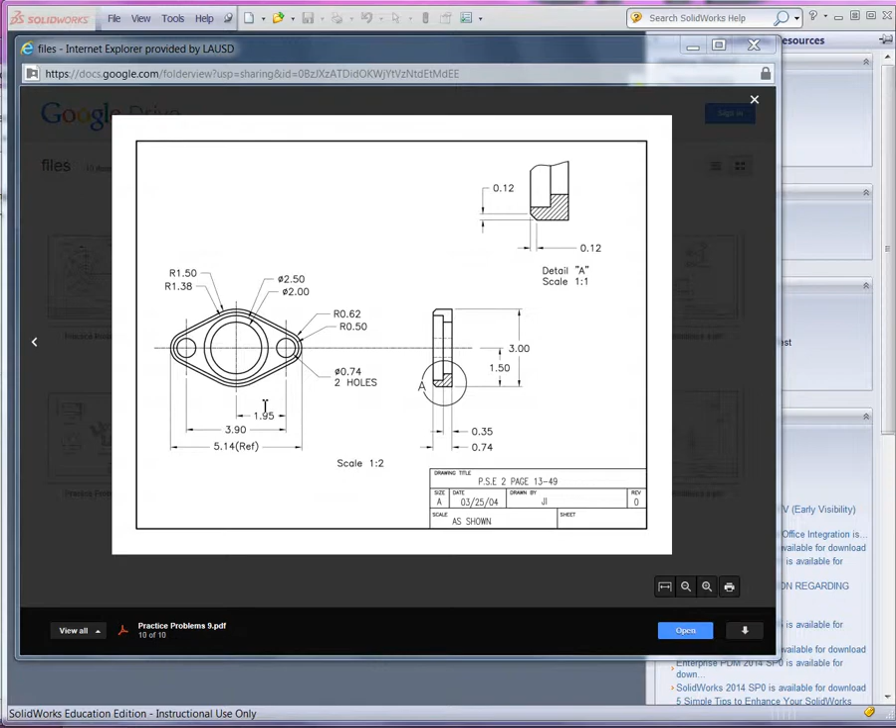One way to look at this is if we look at the top view here, we could certainly set up the base extrude sketch centered on the origin and use some mirrored sketch entities to create the profile and the hole, which we can extrude as the base. Then we could use our legacy hole wizard for the counterbore, and then finally finish with our chamfered edge. And then we can take a look at developing the drawing.

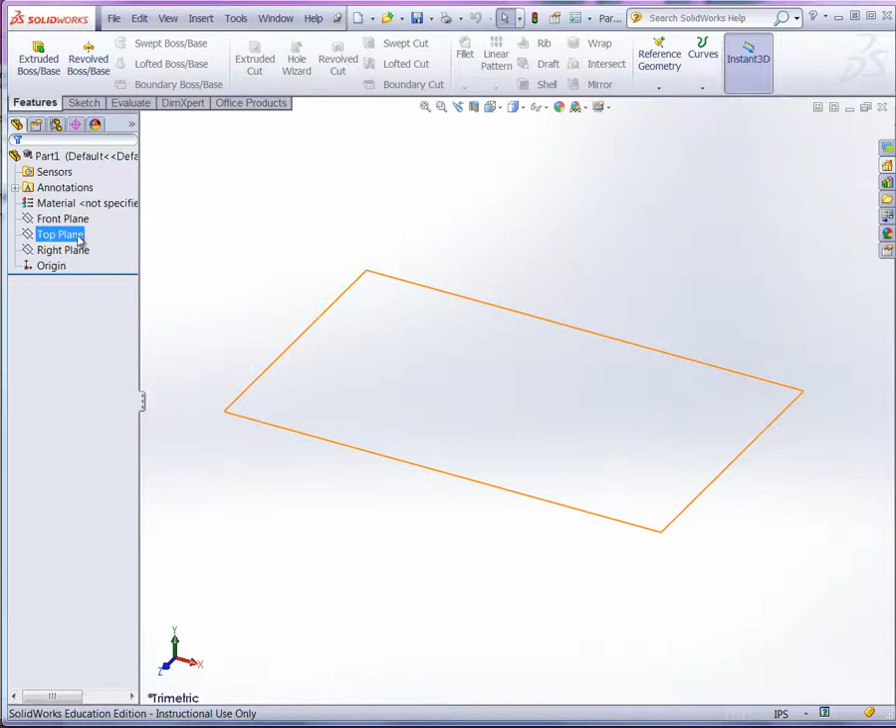So why don't we start with the model first and go ahead to our SolidWorks here, and we'll just start with a basic part template. And one of the first things we want to do here is let's just take a look at our units. I'm just going to use the basic inch, pound, second. Okay. And since we talked about using the top plane first, let's go ahead and select the top plane and start a new sketch there. Also, I want to make sure that I can see my origin, because I'll center everything there.

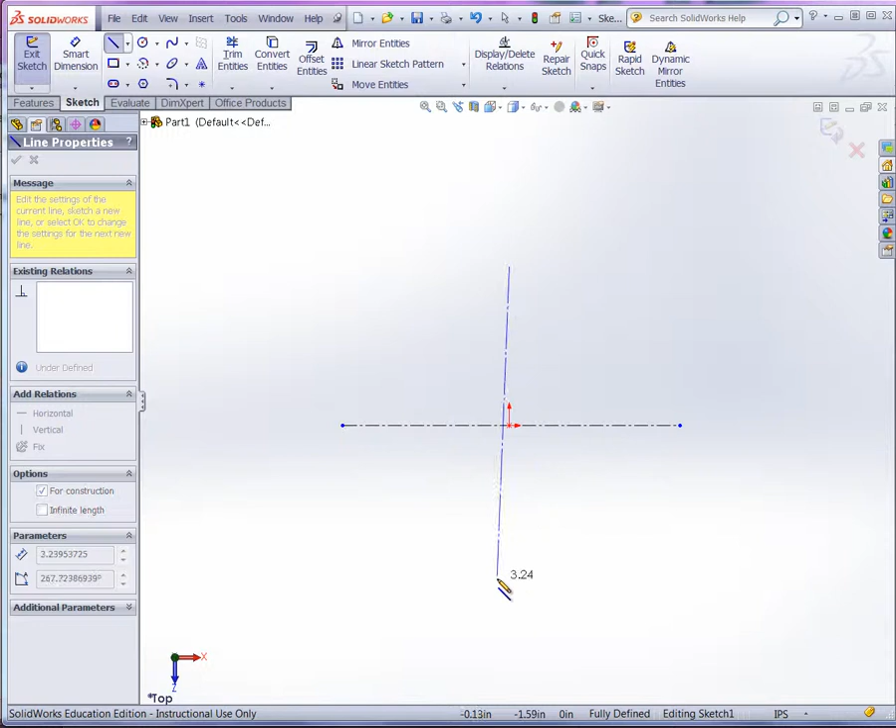And we'll start with some center lines. Just going to project away from the origin there, create a horizontal line going through the origin, and then we'll do another center line that's going to be vertical passing through the origin. Alright, and as we continue with sketching, this is where I can try to use some dynamic mirror to create our layout here. So first of all, let's start with some radii. We got the center radius here, which I'm going to start at the origin, and I'm going to set that at 1.50.

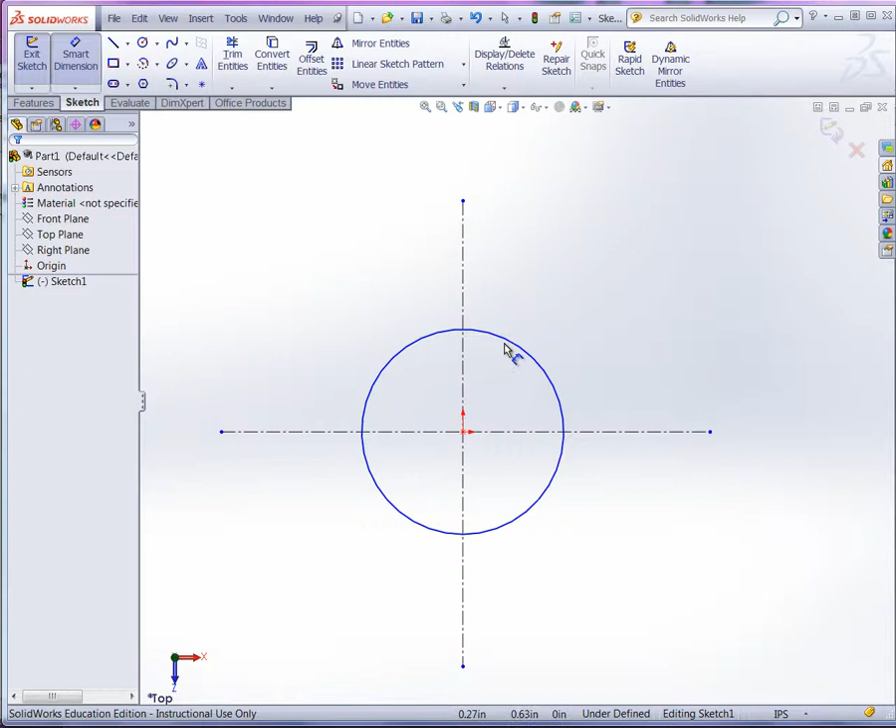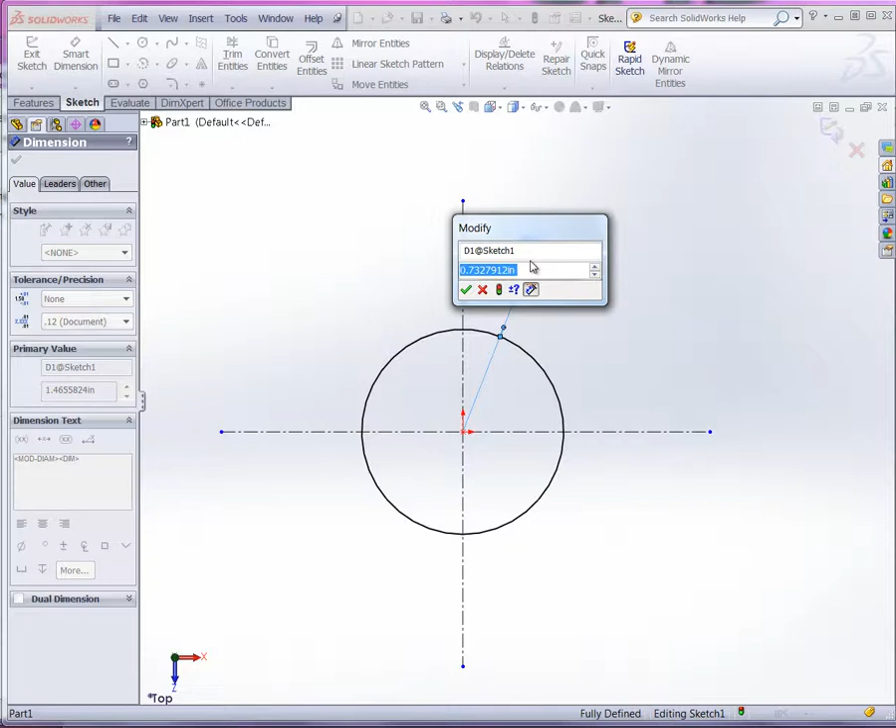Alright, you can see it started with a diameter, but if I just click out of this, select that dimension, right click, and then display it as a radius. Actually, you can see here it says diameter again, so I'll do it like this, right click again, and now you should see radius. It's a little bit cumbersome, but there it is. We'll do radius, and this should be 1.50. Alright, and then next to that we'll do another radius. Again, I'm just starting with the base extrusion profile, which is 0.62.

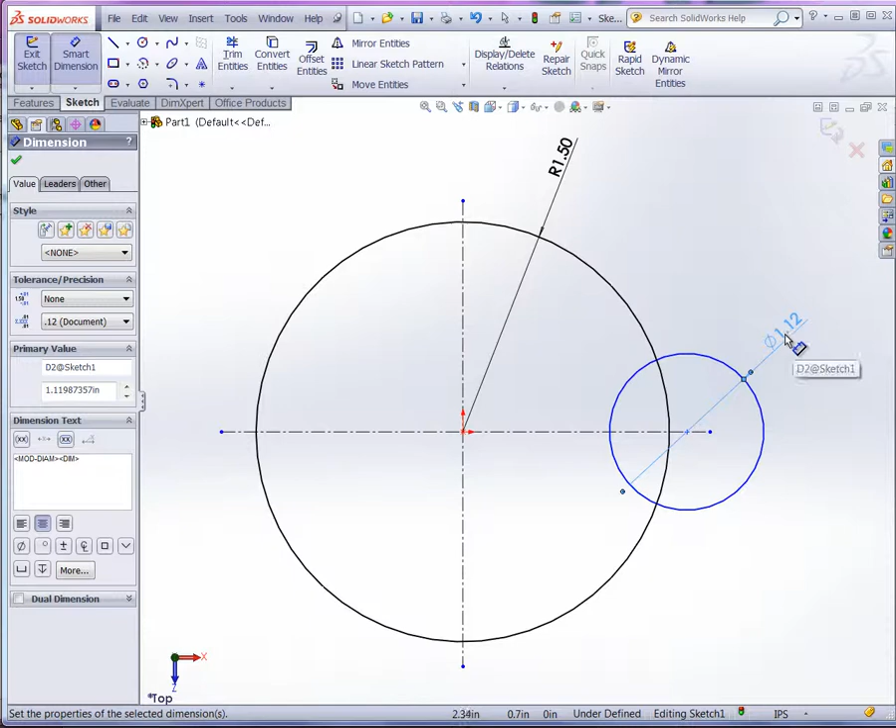Okay, so I'm going to start coincident here on this horizontal construction line. Let's start again with circle, start coincident there, and then use smart dimension. Again, you can see how it went into diameter. I'm just going to right click there, show it as a radius, and this should be 0.62. Alright, now the other thing is I also want to set the distance correctly, and it should be at 1.95. So I'm going to select the center here, and select the center of this circle, and then place that at 1.95.

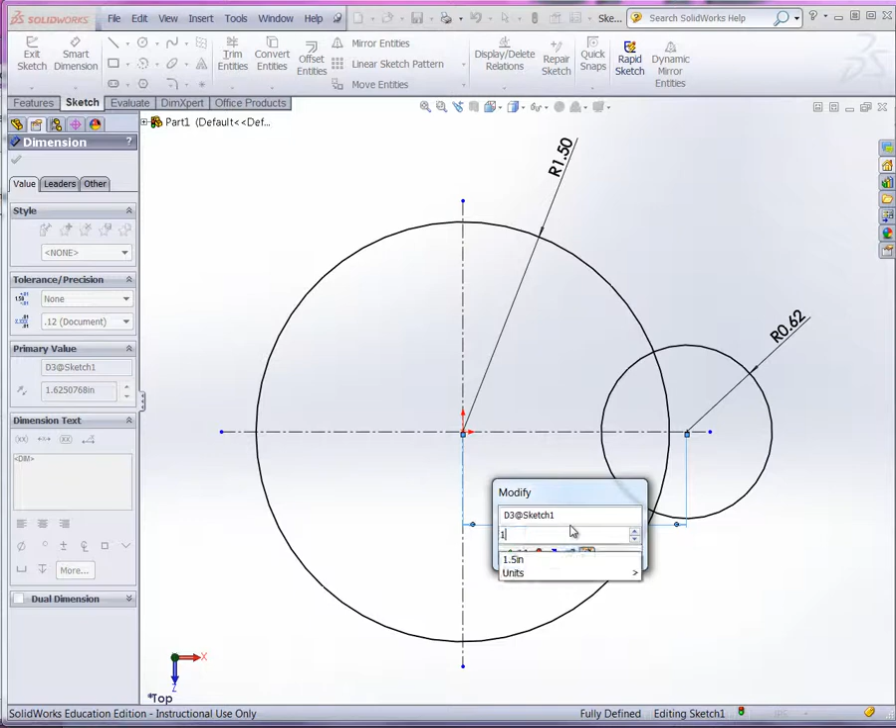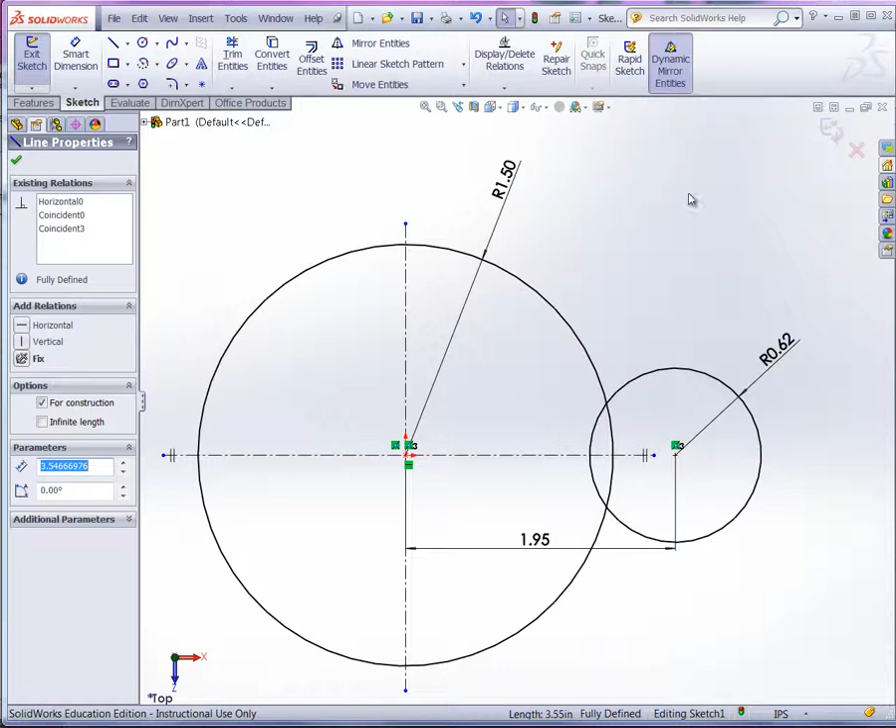Okay. So basically I have 1/2 here, and I can continue sketching out the rest. But what I'm going to do is do the sides here first. So I'm going to select that horizontal construction line and then activate my dynamic mirror. Now I'm doing this so I could do the bottom half. Okay, and I'll go like this. Start with line. First, I'm just going to draw a line. Then I'm going to use relations. Okay, so I'm just going to exit the line command there.

I've got one line selected, and then I'll control click one of the circles. And you can see here we can add a relation. So let me try this again. Let's try the line and then control click the circle there. We should be able to select tangent. Deselect just by clicking anywhere in the drawing area. Again, reselect the line, control click the second circle, and then again use add relation. So you can see, because I still have dynamic mirror, the bottom half is also adjusting.

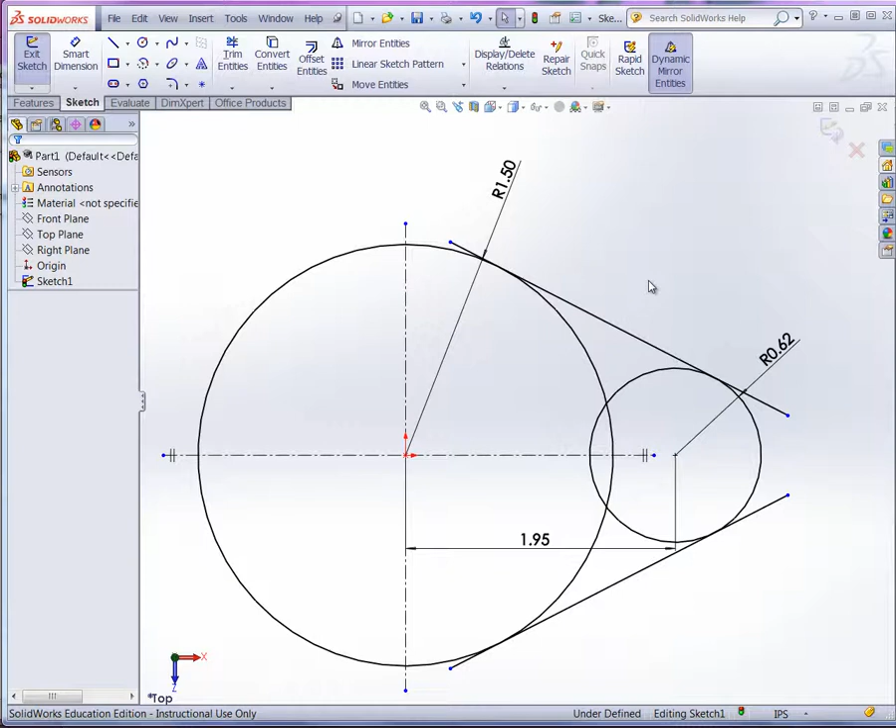Alright, now before I do the other side, I'm just going to trim up the line work here to make it easier to mirror to the other side. So I'm going to use my trim extend command here. Just trim off the excess, and then on the inside as well. All right, we got that.

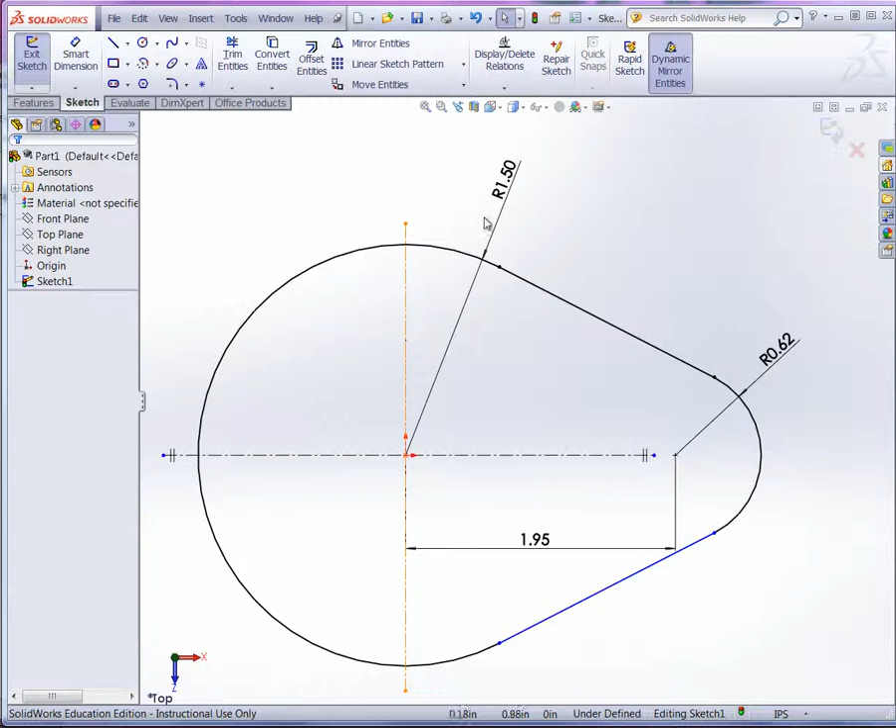Now, using our center reference line here, we're going to use mirror entities. So the entities to mirror are going to be the line here, the arc, and the line down here. And for our mirror axis, we're going to use that vertical construction line there. And then click OK. I'll use Fit to zoom out. And then now we have just a couple more trims to make. So this would be the base profile.

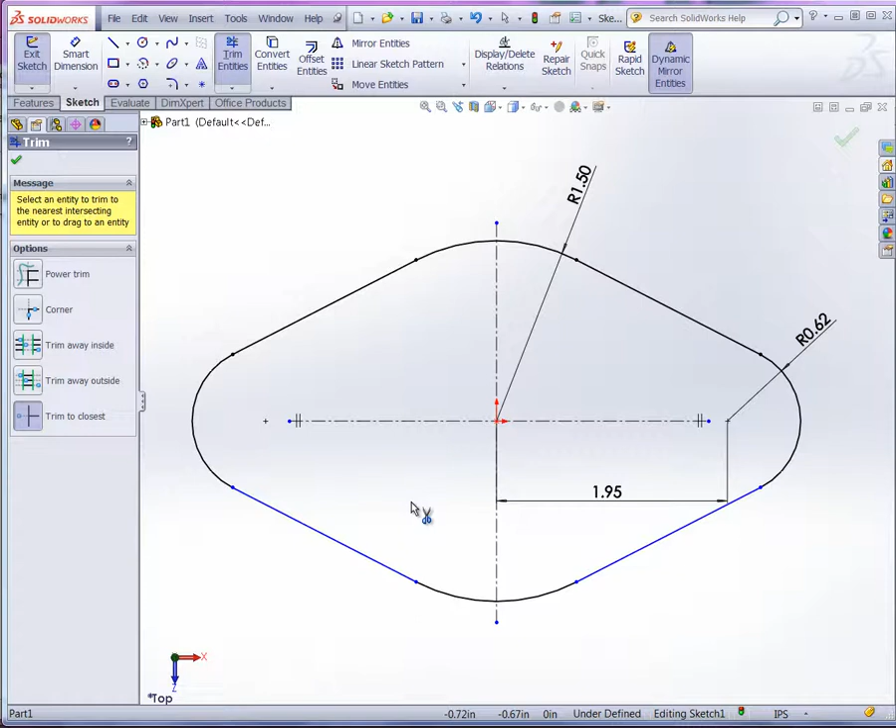Now at the same time, we can create the hole, the two side holes there, which is a diameter of 0.74, and it's also 1.95 from the center there. So we could actually make it concentric with this arc. Now, what I'm going to do is I'm going to select the vertical construction line here, and you'll notice we're going to turn on the dynamic mirror once again, and I'm going to come over here to circle.

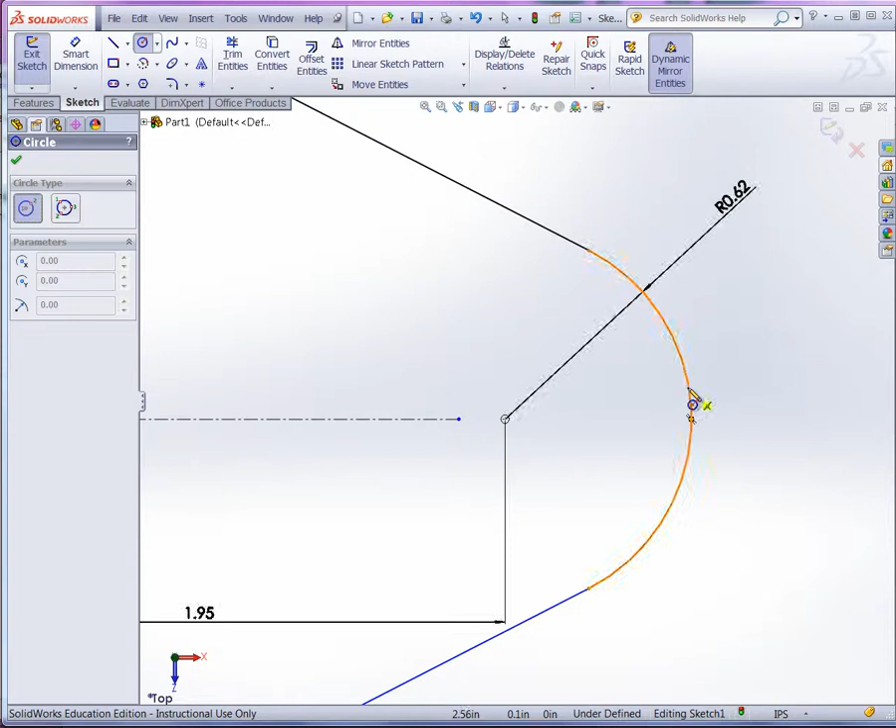I'm going to sketch the circle. First, I'm going to hover over the arc so I can detect the center there, place it, and then we'll dimension it. And that should be a diameter, using Smart Dimension here, a diameter of 0.74.

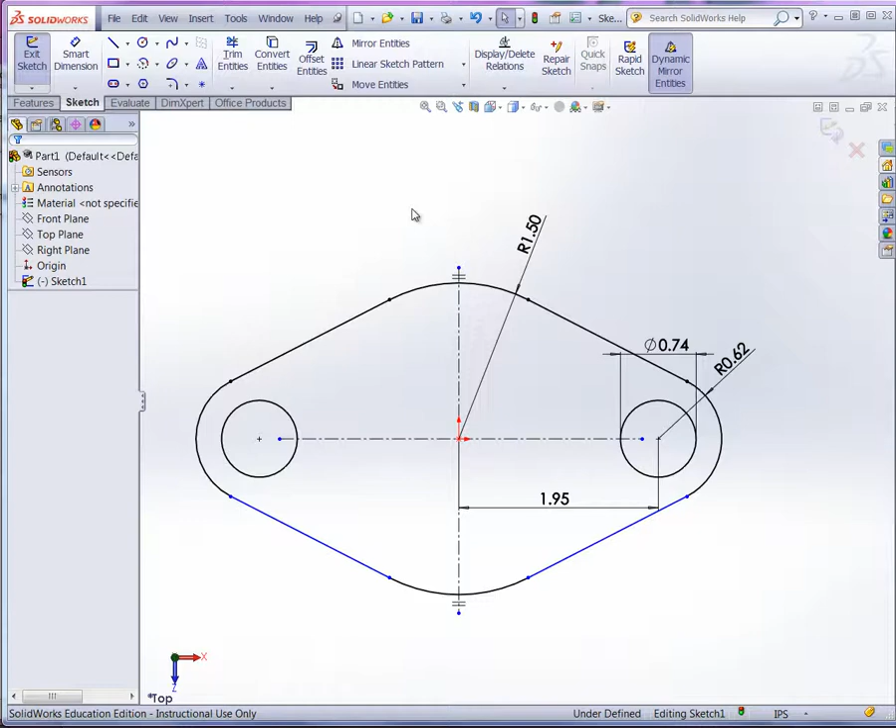Okay, and we can see we have equal sized sketch circle on the other side and same distance. Okay, now this is the base profile, so what we want to do now is we want to extrude it its full height, which is going to be 0.74. So we're going to switch over to features and do the extrude boss and just do a blind 0.74 extrusion. Okay, so you can see closed profiles within closed profiles on extrusion will create the hole.

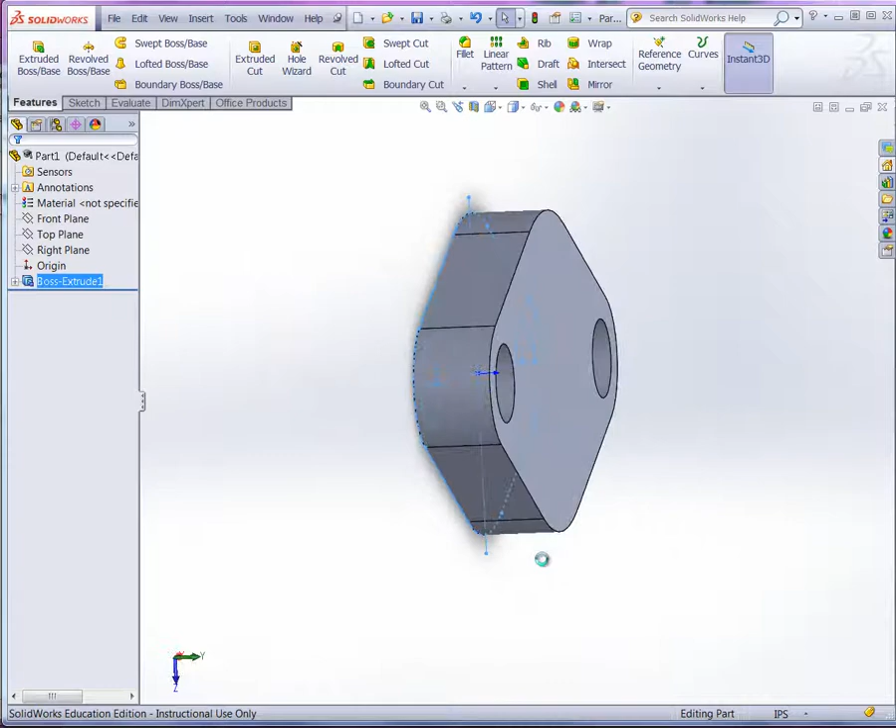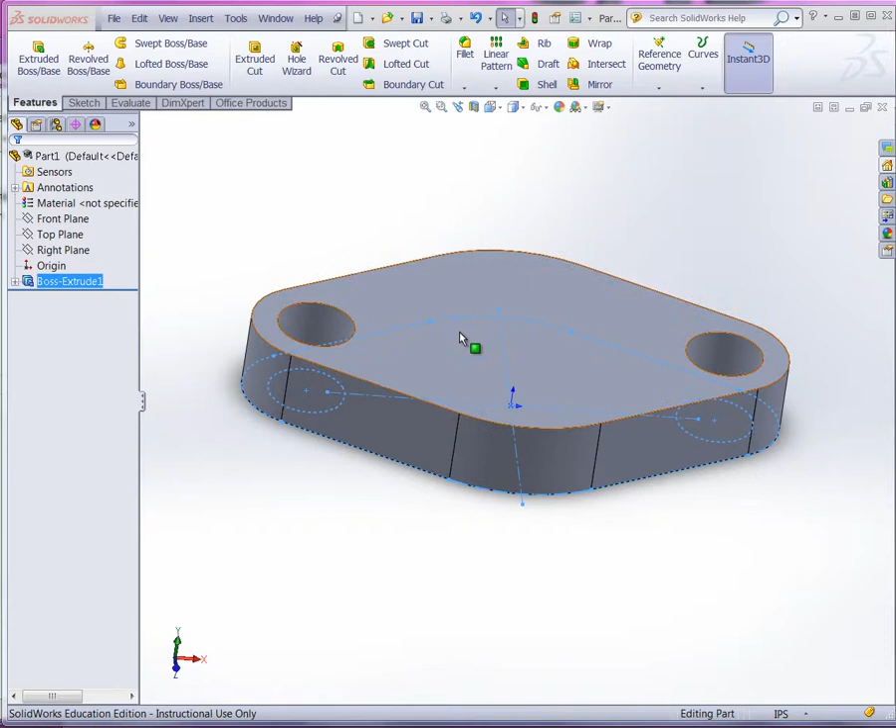I'm going to start with the top face here. And in order to position my counterbore correctly, one thing I could do is I could create a reference sketch and find the center, right? I could also just simply use the hole wizard and use dimensioning to position the hole location point. Let's go ahead and do that.

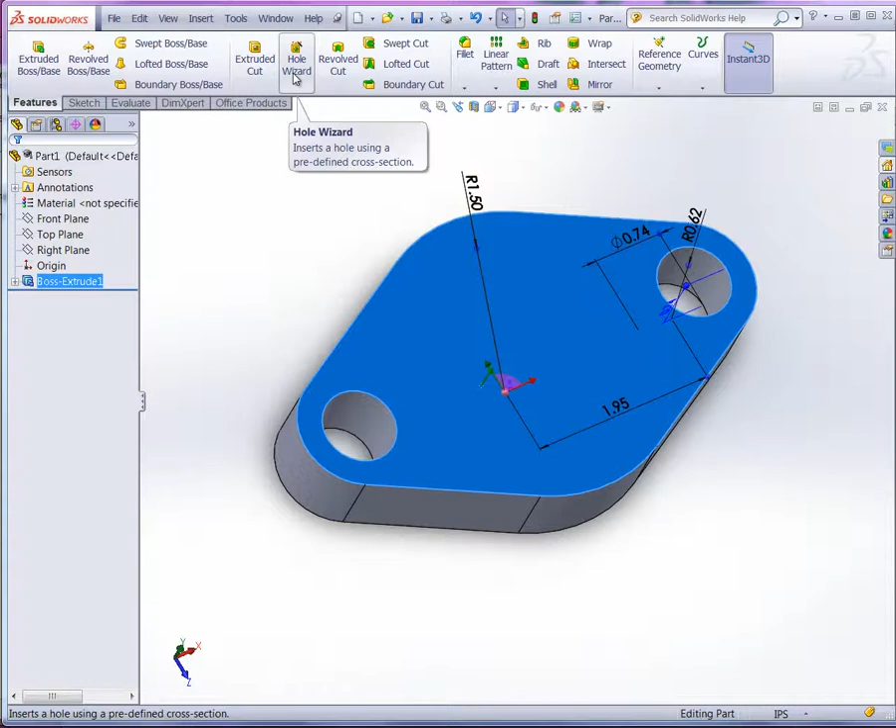All right. So if I start with hole wizard, first thing I want to do is take a look at the type tab and take a look at hole type. You can see here I have legacy hole selected. If you look just below that in the drop down menu, we're going to select the counterbore hole type, and then just below that, let's just compact this here. You'll see here in the section dimensions you'll have the diameter, the depth, the counterbore diameter, and the counterbore depth.

So we know for our counterbore diameter, and that's the larger diameter, that's going to be a diameter of 2.50. And then below here you can see the counterbore depth. Now we don't have the actual depth, but what we have is 0.74 minus 0.35. And that should give us our counterbore depth, right? And actually, I don't know if that's going to work there for us in the value box, but we could certainly just use our calc. So we'll just go ahead and just enter the value there, 0.39.

Okay, now if you look here at diameter, this is going to be the hole through, which is going to be a diameter of 2. And I'm not going to worry about the depth, because you can see down here in the end condition, we're just going to do through all. So these are the settings for the profile for the counterbore.

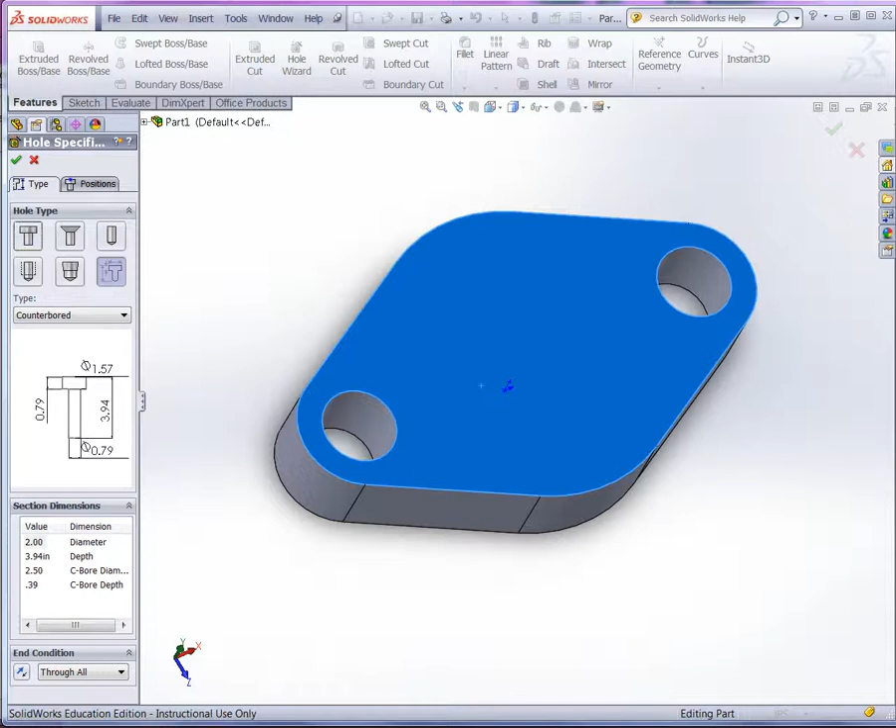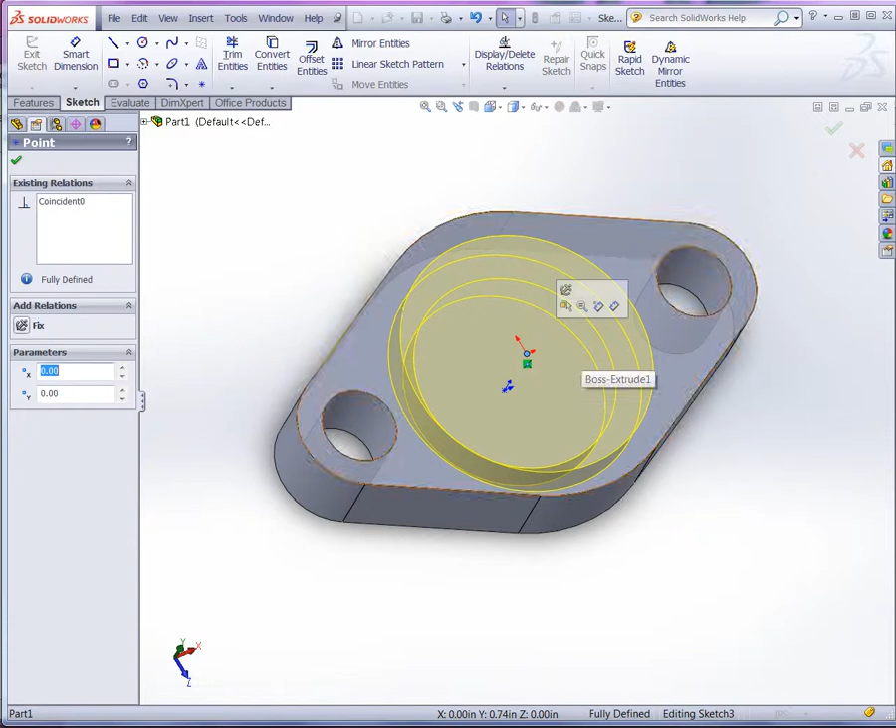And now if we go to the positions tab, you'll notice that we can just place it, right? Keep in mind that we use the origin as the central organizing feature. So we can easily just select the origin there. However, if we don't have something like this that we could snap to, notice that if I just place it, and then if I use a right click and use select, I can still select that point and then create a relation or use smart dimension to actually position it correctly. So I just put it off to the side, and then I just manually created the coincidence with the origin there. Click OK, and now you can see our counterbore.

All right. To finish off the modeling here, we got to do a 0.12 45-degree chamfer. We could easily select the face to do the chamfer, but we don't want to do all of the edges. We just want to do the outer edge here. And if we select one part of the edge and then right-click right over it, you can see you can select loop. Now notice that the outer loop, highlighted blue, is the actual loop that we want. So be careful when you select an edge and what loop you actually select as a result.

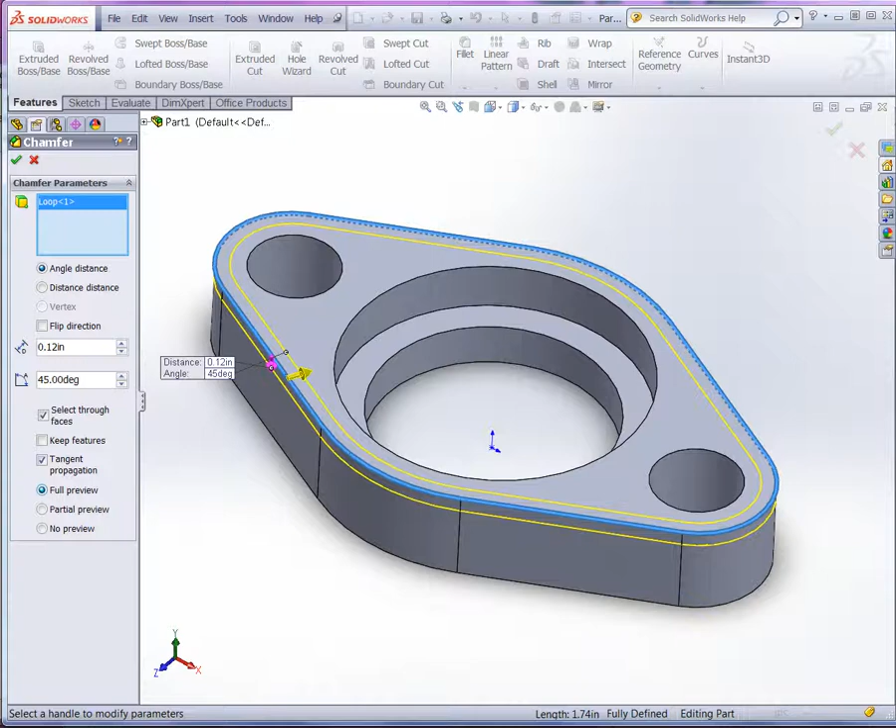And what we'll do here is we'll select our chamfer command, and here you can see we've got 0.12, and we got 45 degrees. Now notice we have tangent propagation, right? We got the whole loop there, so it should go all the way around. We could do a full preview if we need to make adjustments, and then click OK to finalize the part. Now that we got the part, we can actually do our part drawing. So before we do that, go ahead and save it, and then we'll start a new drawing.